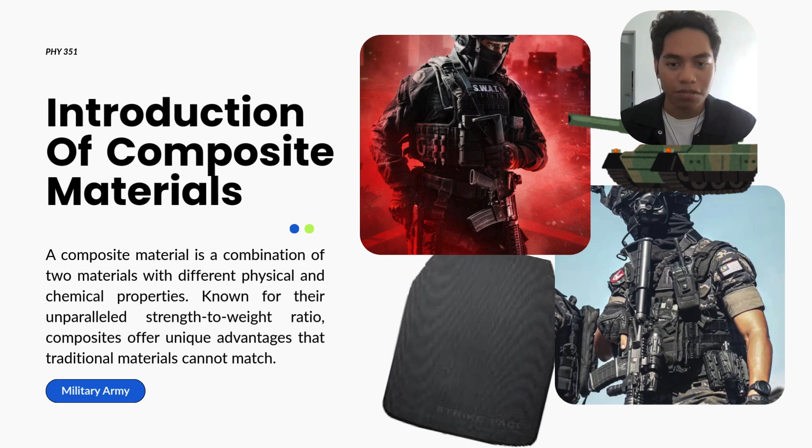A composite material is a combination of two materials with different physical and chemical properties. These composite materials are usually superior to their own individual components. This is why composite materials are widely used, especially in military and law enforcement. In this presentation, we are going to discuss more about it.

Here is our topic overview. Firstly, we are going to talk about background and history - when did the military use composite materials? Secondly, application and examples of how these composite materials help the military. Thirdly, benefits and advantages - why these composite materials are more used than other types of materials. And lastly, challenges and limitations - what are the technical and technological challenges in advancing composite material research?

Now we will talk about background and history of composite armor. In the early armor phase, protection entirely relied on metal, mainly steel.

During World War I and World War II, tanks, military vehicles and protective shields depended on thick homogeneous steel plates. The main idea was simple: the thicker the metal, the stronger the protection. However, this had a serious drawback - heavy weight, high fuel consumption, and difficult to transport and deploy.

Moving to after World War II, from 1950 to 1970, weapon technology evolved rapidly, such as armor-piercing bullets, shaped charges, higher velocity projectiles, and explosives producing higher energy fragments. This triggered the search for new materials with better strength-to-weight ratio.

After that, composite armor was born. Research in materials introduced a new concept: instead of relying on one strong material, engineers could combine multiple materials, each providing a different protection function. The key idea was using a ceramic layer to break and blunt the projectile, and composite backing such as Kevlar or polymer laminates to absorb impact energy. This made armor lighter, stronger, and more efficient.

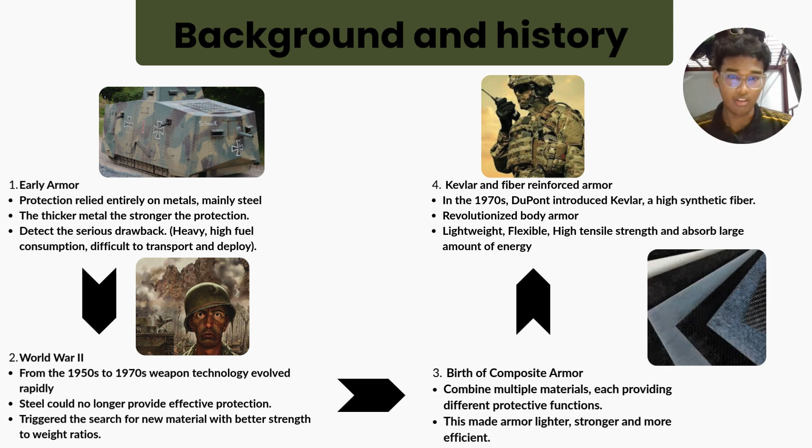Next is Kevlar and fiber reinforced armor. In the 1970s, DuPont introduced Kevlar, a high synthetic fiber. Kevlar revolutionized body armor. The reason why Kevlar was groundbreaking is it's lightweight, flexible, has high tensile strength, and is capable of absorbing large amounts of energy.

Now we move to modern military composite armor. During the Cold War, countries began to develop composite armor for tanks, such as the British Challenger tank, American M1 Abrams tank, and certain NATO armored vehicles.

This armor used ceramic tiles sandwiched between metallic and composite layers, offering superior protection against both kinetic penetrators and explosive warheads. This proves that composite armor was not only for soldiers, but also for large-scale armored vehicles.

Lastly is recent development. Modern composite armor has continued to evolve with advancements in nanomaterials, ultra-high molecular weight polyethylene (UHMWPE) or Dyneema, graphene research, smart armor with sensors, improved ceramic technology, and lightweight ballistic composites. These improvements address modern battlefield needs, countering threats such as IED fragments, armor-piercing rounds, and high-speed projectiles.

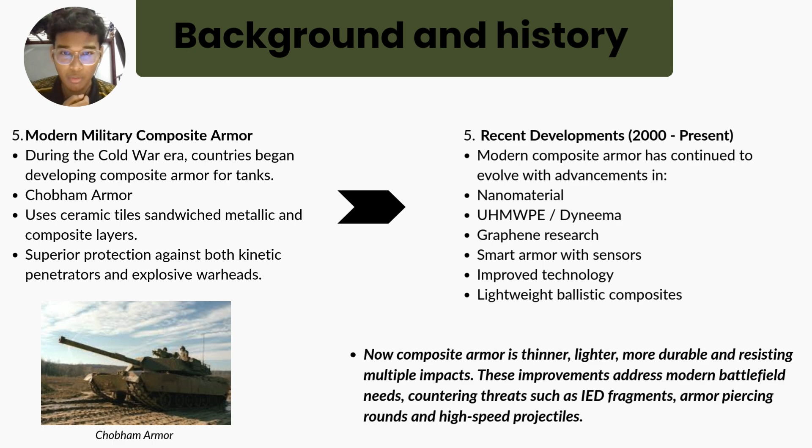There are so many applications of composite armor in the army, which include body armor, military vehicles, cockpit areas, tactical shields, and bomb disposal units. Here are examples of composite armor that has been used in military.

First one is Chobham composite armor on the M1 Abrams tank. Chobham armor is a well-known composite armor system used on the M1 Abrams main battle tank. It consists of multiple layers of ceramic tiles, metal plates, and a composite backing material.

Each layer plays its main role: the ceramic layers shatter incoming kinetic penetrators or shaped charges, while the composite and metal layers absorb and dissipate the remaining energy.

The challenges they face are high weight due to multiple protective layers, and complex manufacturing with strict secrecy leading to limited testing and transparency. So how do they overcome this challenge?

First, optimization of layer thickness and material placement. Second, later versions incorporated depleted uranium layers, improving protection without a proportional increase in size. Lastly, modular design allows upgrades without redesigning the entire vehicle.

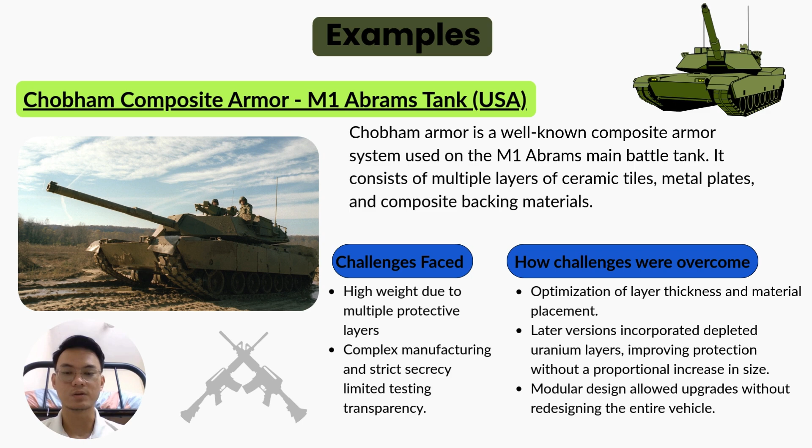Next is composite body armor for law enforcement. Modern law enforcement body armor uses aramid fibers, known as Kevlar, UHMWPE, ceramics, and polymer composites. Some systems integrate shear thickening fluids which remain flexible during normal use but stiffen instantly after ballistic impact.

The challenge they face is balancing comfort, flexibility, and protection. They also have a problem with retention and long-term wearability. So how do they overcome this challenge?

Hybrid composites have been reduced in terms of thickness and weight. Next, improved ergonomic panel design and breathable materials.

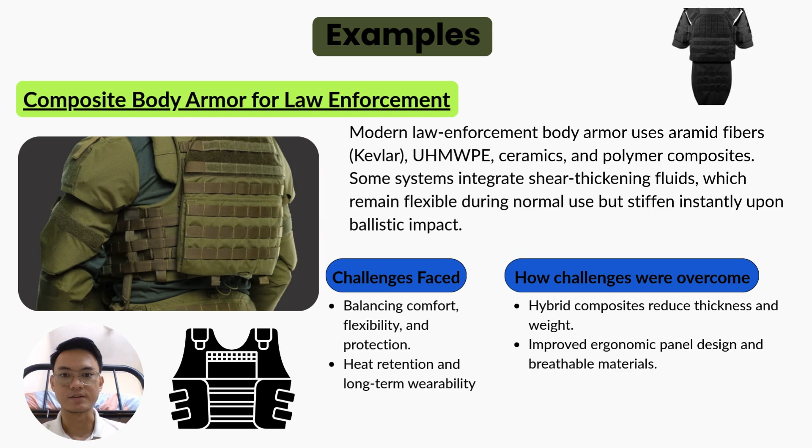Here are the advancements and innovations of composite armor in military. First one is nanomaterial enhanced composite armor.

Recent research focused on incorporating carbon nanotubes, graphene and nanoceramics into composite armor materials. These materials significantly improve energy absorption, tensile strength, and crack resistance while reducing overall weight. The impact they're given is higher ballistic efficiency than steel at a fraction of the weight.

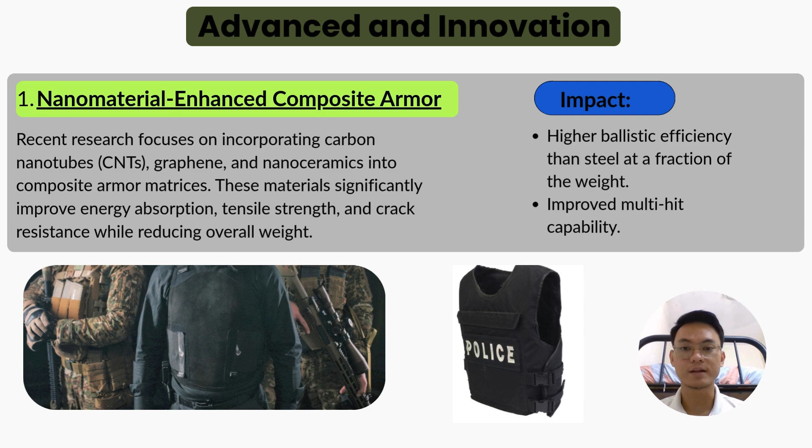Next is improved multi-hit capability. The second advance is modular and adaptive armor systems. New composite armor systems are increasingly modular, allowing armor panels to be added or replaced based on mission threat levels. The advantages given to militaries include reduced vehicle downtime, customizable protection for urban, desert, or battlefield environments, and lower life cycle costs.

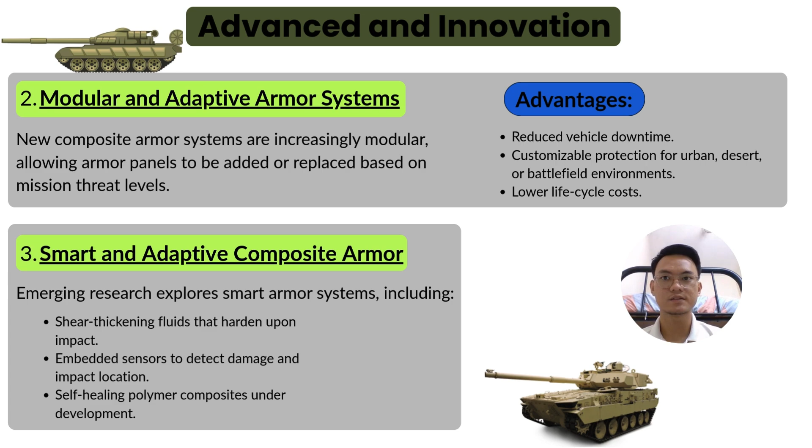The third advance and innovation is smart and adaptive composite armor. Emerging research explores smart armor systems, including shear thickening fluids that harden upon impact, embedded sensors to detect damage and impact location, and lastly self-healing polymer composites under development.

Number 4 is lightweight personnel armor innovation. Usually armor is very heavy and not comfortable to use. So for military and police use, they use advanced UHMWPE composite and hybrid fiber systems that have led to thinner ballistic plates, improved mobility and endurance, and higher protection levels meeting modern NIJ standards. This is criteria that make armor lighter weight and more comfortable to use.

The overall impact of these advances is that modern composite armor now provides greater protection at lower weight, improved maneuverability and survivability, and lastly scalable mission-specific solutions.

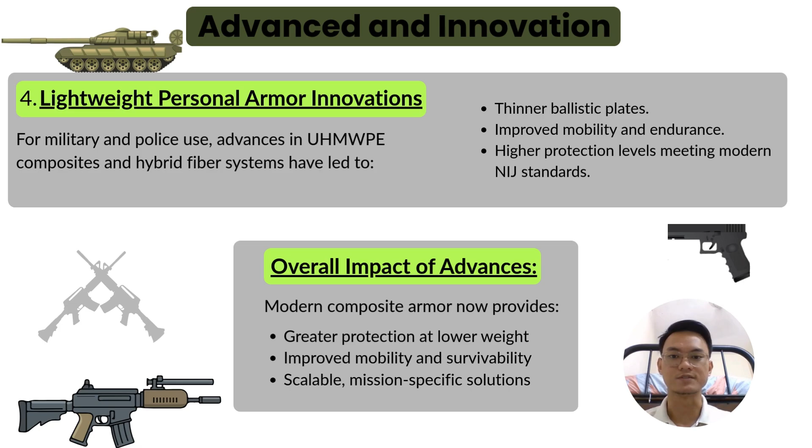I will share about benefits and advantages. First, composite armor provides strong protection while being much lighter than steel or metal armor. This allows soldiers and law enforcement officers to move faster, carry more equipment, and operate for longer periods without fatigue.

Second, composite armor uses a layered structure, where ceramics break the projectile and fiber composites absorb the remaining energy. This combination is highly effective against bullets, shrapnel, and blast fragments.

Third, high energy absorption. Fiber materials such as Kevlar and UHMWPE spread the impact energy over a large area. This reduces penetration and lowers the risk of severe blunt force injuries to the wearer.

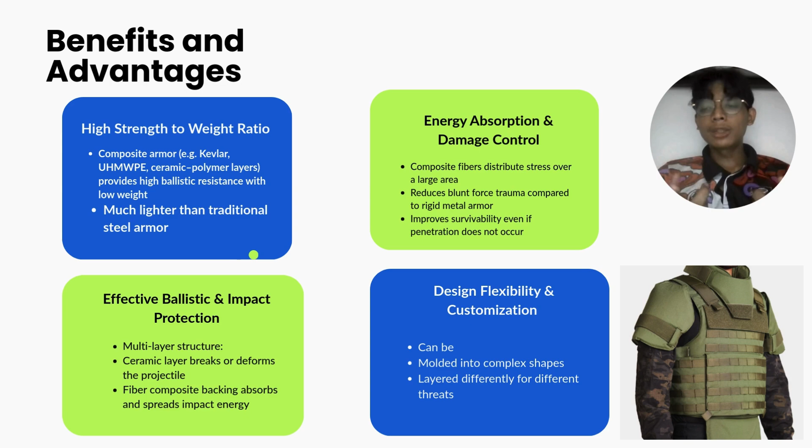And last is design flexibility. Composite materials can be molded into different shapes and thicknesses. This allows armor to be customized for helmets, body vests, shields, and vehicle protection based on specific threat levels.

The third explanation is about challenges and limitations of composite armor. First is high cost. Advanced materials such as ceramics and high-performance fibers are expensive. The complex manufacturing process increases production costs, limiting large-scale deployment.

Limited multi-hit capability. Ceramic layers tend to crack after the first impact. Once damaged, the protection in the area decreases, making the armor less effective against repeated hits at the same location.

Number 3 is thickness versus comfort trade-offs. To achieve higher protection levels, more layers are needed, increasing thickness. This can cause discomfort, heat buildup, and reduced breathability during long missions.

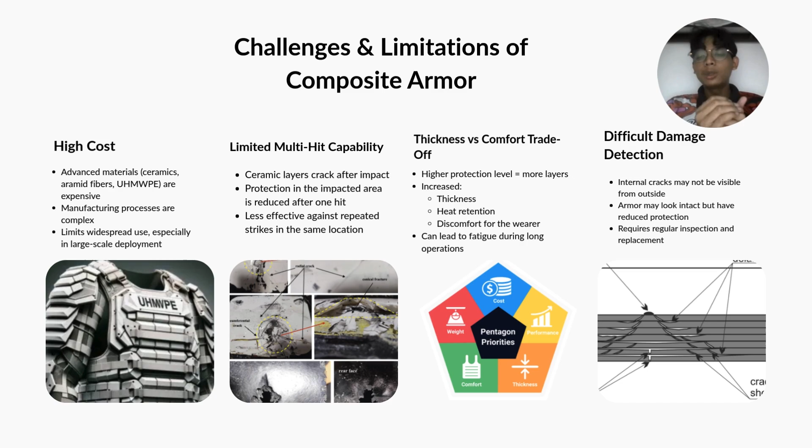The last challenge and limitation is difficult damage detection. Internal damage such as cracks or delamination may not be visible externally. Armor that looks intact may already have reduced protective capability, requiring regular inspection or replacement.

Now let's go through the future trends. As of mid-January 2026, the composite armor field is accelerating toward lighter, smarter, and more adaptive systems. The NIJ standard 0101.07 is driving major redesigns.

The first compliant products list, CPL, for 0101.07 certified gear is expected early to mid-2026, while the old 0101.06 CPL will remain available through at least the end of 2027 for smooth transition. Manufacturers are focusing on RF1, RF3 rifle threats, improved multi-hit performance, better female fit designs, and stricter testing protocols.

The industry outlook for 2026 is strong, with record growth in 2025 continuing into elevated defense budgets, UHMWPE or ceramic hybrids dominating, and innovations in nanomaterials and adaptive tech.

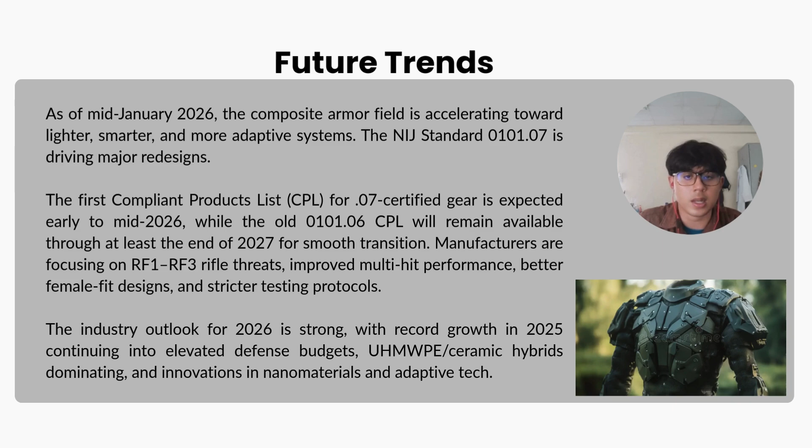The first one, we have extreme lightweight UHMWPE and Dyneema evolution. Next gen Dyneema grades HB330 or HB332 for hard plates, SB301 for soft armor, enable 10 to 45% weight reductions. Rifle plates, RF1 threat, are now under 2 pounds, some 1.65 to 2.2 pounds for 10 by 12, with thinner profiles and excellent multi-hit capability when backing ceramic.

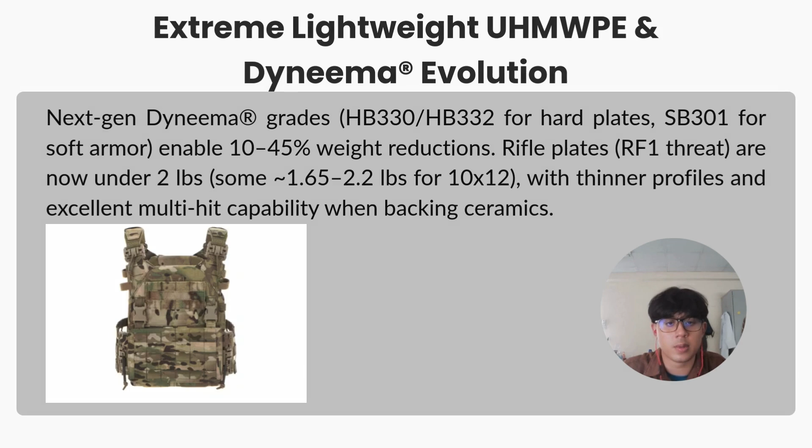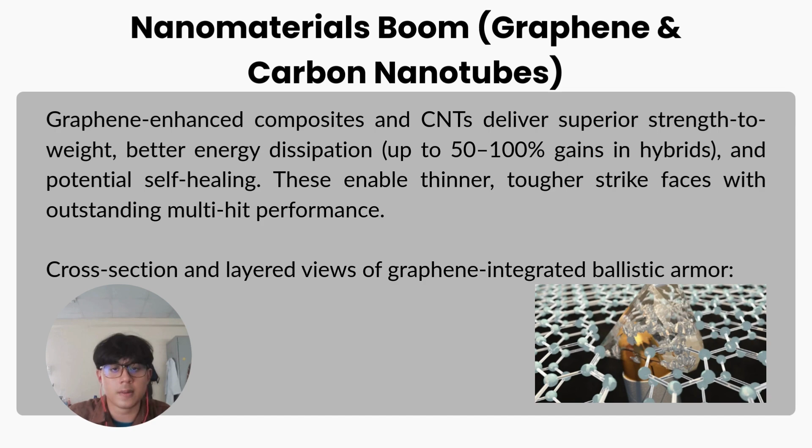Second, we have the nanomaterials boom: graphene and carbon nanotubes. Graphene-enhanced composites and CNTs deliver superior strength to weight, better energy dissipation, up to 50 to 100% gains in hybrids, and potential self-healing. This enabled thinner, tougher strike faces with outstanding multi-hit performance. Cross-section and layer view of graphene integrated ballistic armor is in the picture here.

Third, we have shear thickening fluids, STF, liquid or adaptive armor revival. STF fabrics stay flexible for comfort but harden on high velocity impact. Hybrids with UHMWPE are expanding for concealable soft armor, stab or spike resistance, and better ergonomics in law enforcement and military soft panels. This picture right here is the impact test visual of STF-based flexible protection.

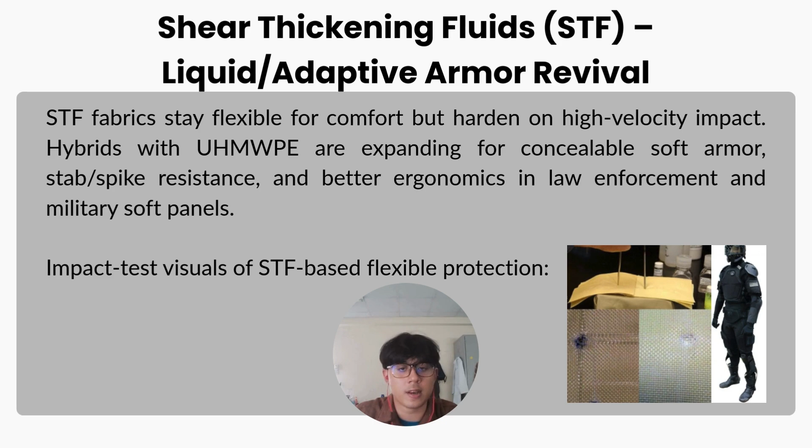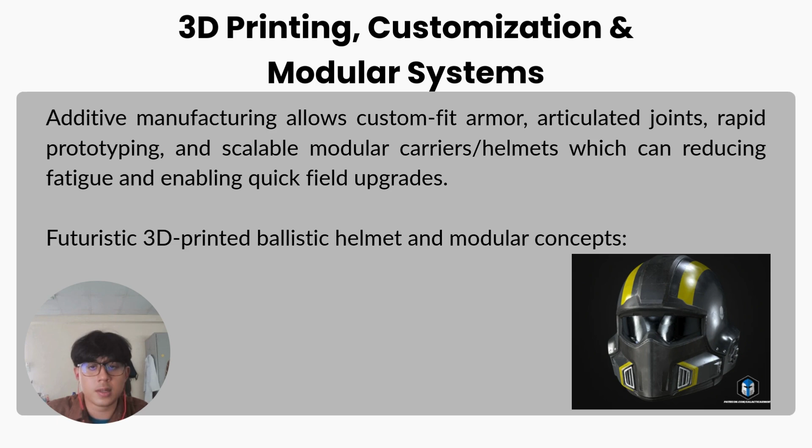Fourth, we have 3D printing, customization, and modular systems. Additive manufacturing allows custom-fit armor, articulated joints, rapid prototyping, and scalable modular carriers or helmets, which can reduce fatigue and enable quick field upgrades. Futuristic 3D printed ballistic helmet and modular concept is in the picture right here.

Last but not least, we have NIJ 0101.07 adoption plus smart and sustainable features. Full shift to 0.07 with unified threat catalog 0123.00 emphasizes real-world threats. Emerging additions include embedded sensors for vital monitoring, dynamic response systems, eco-friendly or recyclable composites, and multi-threat protection combining ballistic plus agent protection.

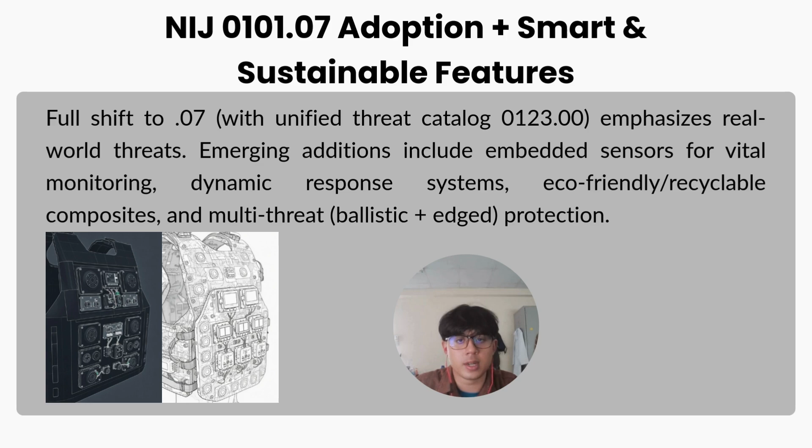For conclusion, isomerism in coordination complexes and composite armor show how precise structural design shapes outcomes across scales. In chemistry, small differences in ligand arrangement determine a compound's properties and life-saving applications, as in cisplatin's success versus its trans isomer. In armor, layered ceramic and fibers like UHMWPE provide strong protection with low weight, enhancing mobility for military and law enforcement.

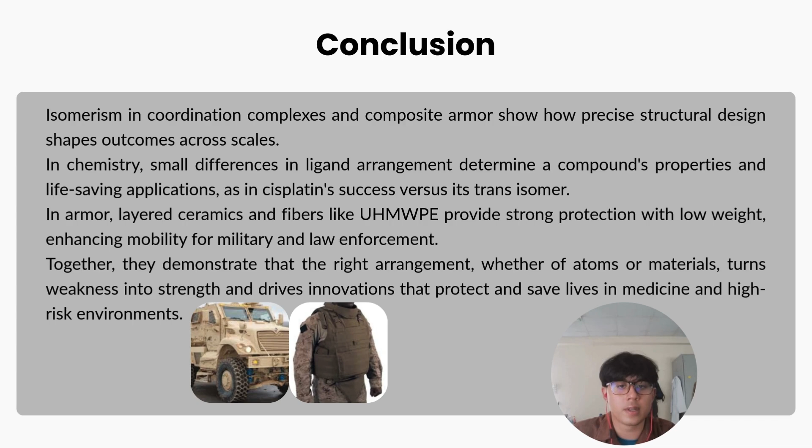Together, they demonstrate that the right arrangement, whether of atoms or materials, turns weakness into strength and drives innovations that protect and save life in medicine and high-risk environments.